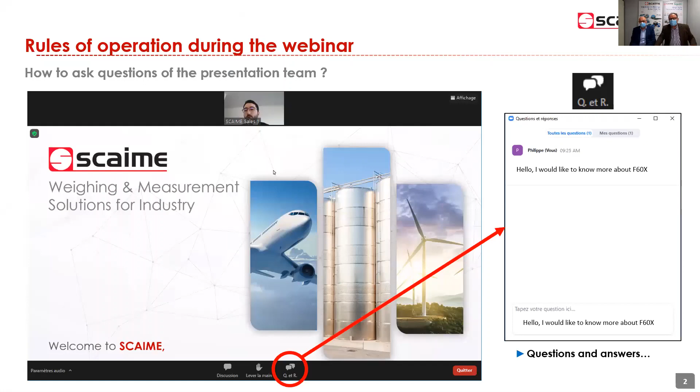So about tank weighing solutions, why are we talking about this as an important issue? Of course, tank weighing is used for measuring what is inside a tank, a hopper, a vessel, and the weighing gives the possibility to know the exact amount of material inside this vessel. And when it's connected to a central computer system of the company, it gives the possibility to have an on-time, real-time inventory of the raw materials used in the process.

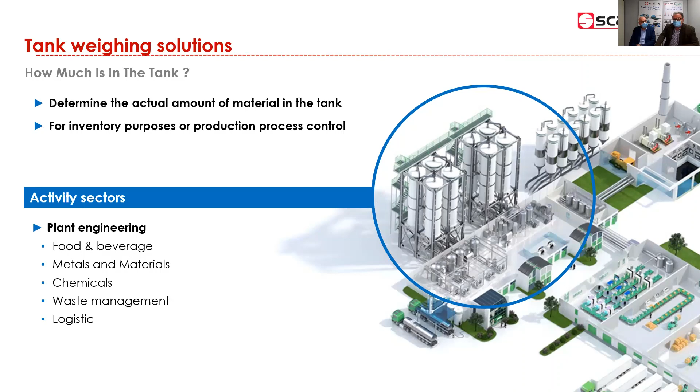So the activity segments targeted by such applications are, of course, food and beverage applications, because there is a lot of mixing of all kinds of raw materials. Metal and materials, chemicals, waste management, logistics. So today we'll discuss with Olivier all these different applications, and we will tell you what is used in our range and why we have launched this or that weighing kit in order to make it simple for our customers. So, Olivier.

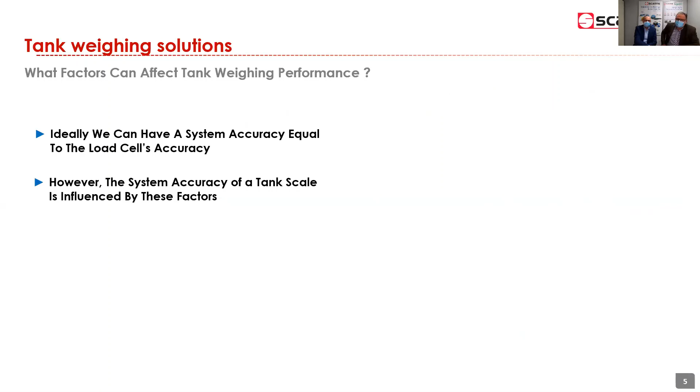Okay, Olivier, so what are the factors which can affect tank weighing performance? Yes, before describing exactly our mounting kit range, it's very important to come back to the factors that can affect the performance, the accuracy of a measurement. Because ideally, when we put load cells under a structure, a vessel, we would like to have the accuracy equal to the load cells accuracy. But in real life, it's never the case.

And the system accuracy of a tank scale is influenced by a lot of factors. It's important to know what these factors are, because our kits are designed to minimize the effect of these factors. So here's a quick list: structural integrity, installations, calibrations, tank design, environmental effects. All these factors can affect the accuracy, and we will list the main factors of influence.

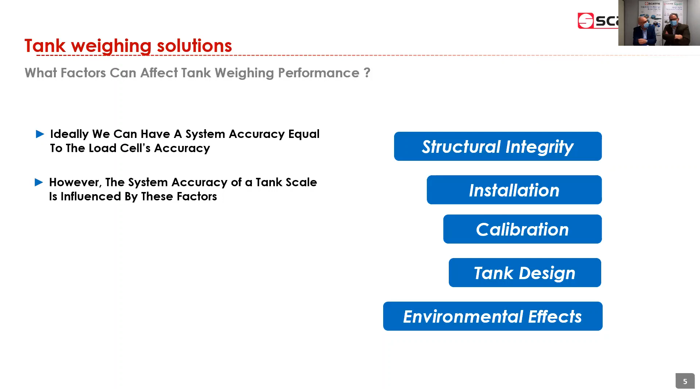So what are the main factors of influence on tank weighing? The first one, for example on an external tank, is the wind or seismic force. This can affect the accuracy because there's an effect on the load cells. For example, big vertical silos can be considered as sails, so when there is wind and the silo is empty, you may have a very strong side force which could push the silo and let it fall. You can also have vertical force, and there's some risk of lifting off the silo, so you have to take care about this effect for safety.

For accuracy, one of the main effects is the temperature effect, because a tank is often a piece of metal, and under temperature changes you have contraction or expansion of the structure. If you fix the load cells directly from the ground to the structure, you will have unwanted forces, and the accuracy will be affected. So one of the main goals of the weighing kits is to separate the load cells from the structures.

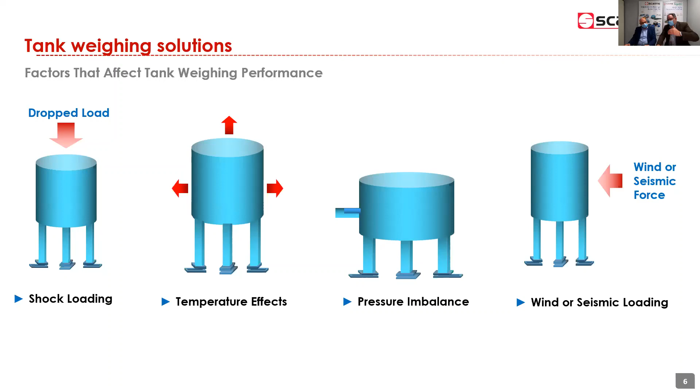Yes. An important factor of influence, because often the use of a tank is to mix some product, is the vibrations. You could have internal vibration in case of a mixer, and you could have also external vibrations due to some external effect. And all these effects - for example, in big factories, sometimes you have big metal structures, everything is shaking inside. Yes, you can have external motors or external devices that can generate external vibrations. We experience that many times.

Also, a very important factor is the structural design of the tanks, and it's very important to minimize the deflections under load between the different load cells to have good accuracy.

And the last effect, very important, is the piping, because generally on the tank you have to fill and unload the tanks and so on. You have some pipes, and it's very important to minimize the effect of the pipe for the weighing.

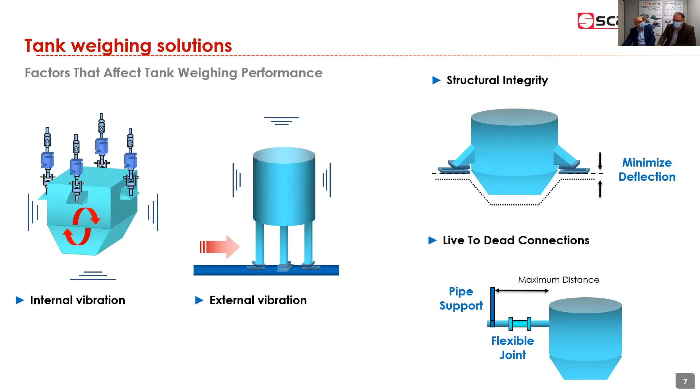So on the load cells, what is the main importance for the accuracy? We would like to measure the vertical load. The vertical load is the force we need to measure - in real life, gravity. And the main functionality of our kits is to measure this vertical load by eliminating all the unwanted forces.

You can see below the slide, for example, the angular load, eccentric loads, torsional moment, or side force or end force. All these forces could affect the accuracy of the load cells. And so if you fix the load cells directly to the structures, as you have some deformations of the structure, you will generate this type of unwanted force that can affect the accuracy.

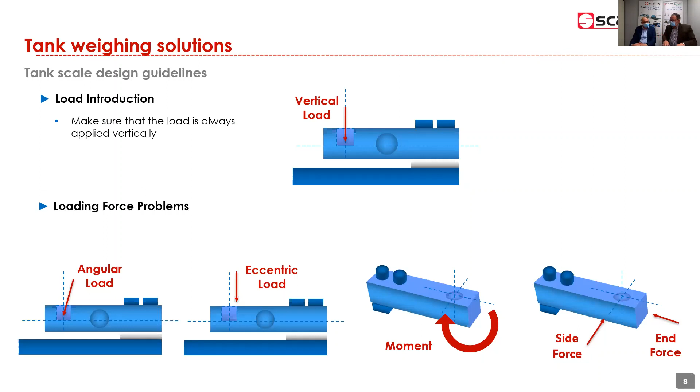So to summarize, the only force we want to measure is the gravity-accelerated mass, so it's purely vertical. Any other force applied to the load cell will be read by the load cell, but the load cell will not be able to make the difference between the real load and the side force. Exactly. So that explains why it would really affect the accuracy of the system, and that needs to be taken care of by the kit.

For example, a static horizontal vessel without mixer. So typical liquid tanks. Yes, liquid tanks. You don't need restraint device. You need a safety device, for example stoppers, because you could have exceptional shocks or accidents, but in normal operation, you don't have big lateral forces, important lateral forces.

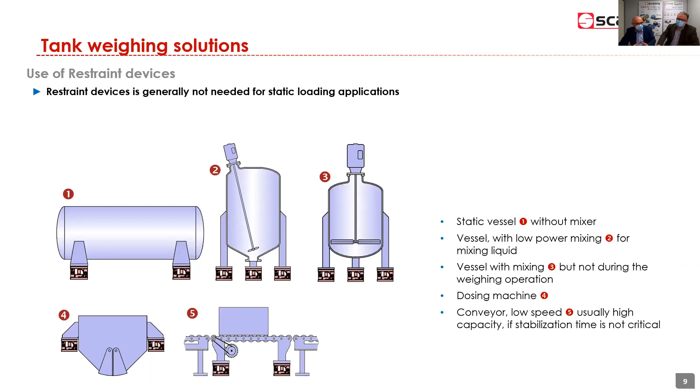About conveyors, it depends generally on the speed and the capacity. Generally, for low speed conveyors, you don't need to add a restraint device. At the opposite, for dynamic loading applications, you need to add a restraint device to avoid displacement of the structures.

It's the case for vessels with high power mixers for pastes or for powder or solids. In that case, you will generate lots of lateral forces during operations, and you have to restrain the displacement of the tank.

It's for the second example, you don't have mixers, but it's a particularity of piping. If you have rigid pipes, you don't have to forget to add restraint, because you could have a pipe failure due to fatigue, due to vibrations. It's very important when you have lots of rigid pipe without flexible, to avoid a big displacement, a lateral move.

Also, the third example is a horizontal mixer with a big mixer for pastes. Generally, restraints are requested, and it's the same for high-speed conveyors. Generally, for high-speed conveyors, if you want to weigh with a minimum of stabilizations, you need to add restraint. So in that case, you stop the crate, for example, on the conveyor, and you generate side forces.

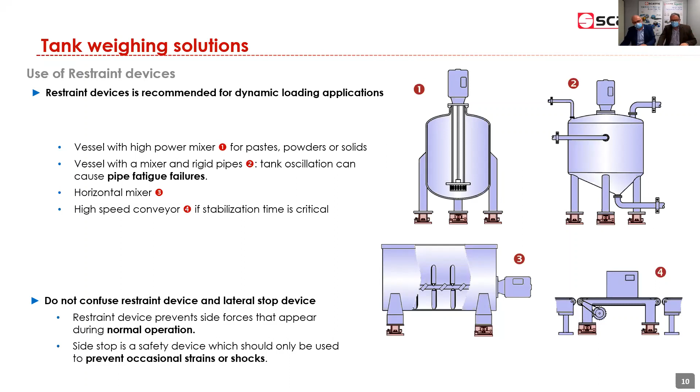So let's go for the offer we have, explaining why we have different kits and what they are used for. That's the key point.

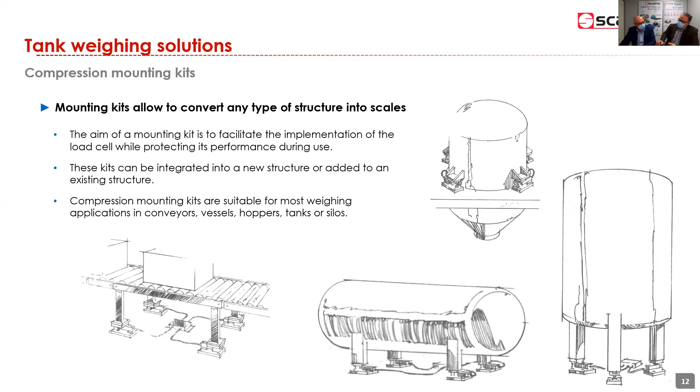The mounting kits allow converting a structure into scales. The aim of mounting kits is to facilitate and make the implementation of mounting easier, and to minimize all the unwanted effects we have seen just before. So in other terms, make it simple for the teams installing the products, and take care of all the environmental effects that might affect the measurement.

So here it's an overview of our mounting kit range. As you see, we can provide mounting kits from a very low capacity—we start at 10 kilograms by load cells—up to 750 tons. So it's a pretty comprehensive range, for all the capacities, and capacity is the first data we have to take care of.

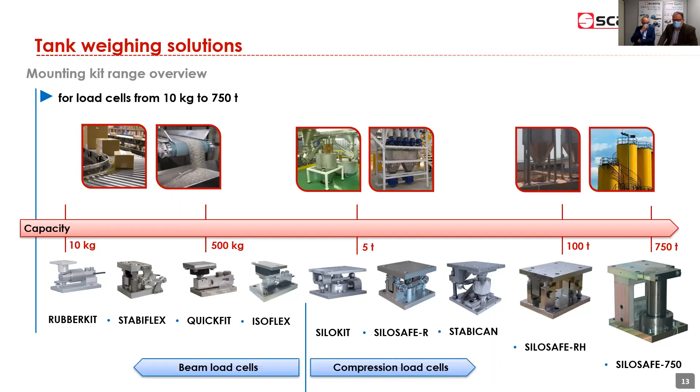So we will start with a low to middle capacity, from 10 kilograms to 5 tons, with the Quickfit mounting kit. The Quickfit is the last mounting kit we have launched. The advantage of this kit...

It's articulated. It provides also a possibility of angle of tilt of the structures, that can tilt in both directions. And here it's very interesting.

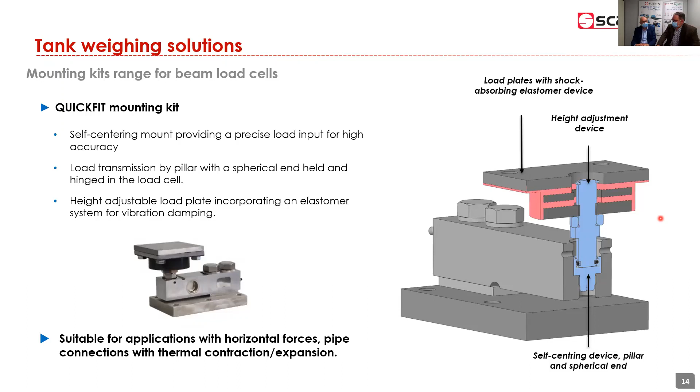So that's the Quickfit, one of our latest kits in the range. I think we launched it at the beginning of last year, and it comes always in stainless steel. Yeah, so let's see the next one.

The next one is a rubber kit for low capacity, from 10 kilograms to 500 kilograms. That's the one here, for the F60X load cells. And the Isoflex is for the SK30X, up to 5 tons capacity. So it's the same principle, but one is for the bending beams up to 500 kg, and the other one is for the shear beams from 300 to 5,000 kilograms.

The main function of this kit is to absorb shock and vibrations. You have a big elastomer as a damper, but the difference with a Quickfit is that you don't have articulations, so it's not possible to tilt it. It will not absorb a difference in parallelism that you may have in the structure. The Quickfit is very well fitted for that. The Isoflex needs to be perfectly aligned if you want good accuracy. If you have some tilt of the structure, it will affect the accuracy.

These kits are available for applications with horizontal force, pipe connections, but with low thermal contractions and expansions. This part here is rigid, it will not move, compared with the Quickfit where we have this articulation. Here we are totally rigid, which means the elastomer itself has to take care of all the differences, and that makes it so it could absorb some tilt, but it remains some torsional moments. And torsional moments mean a bad effect on the measurement, the quality of the accuracy.

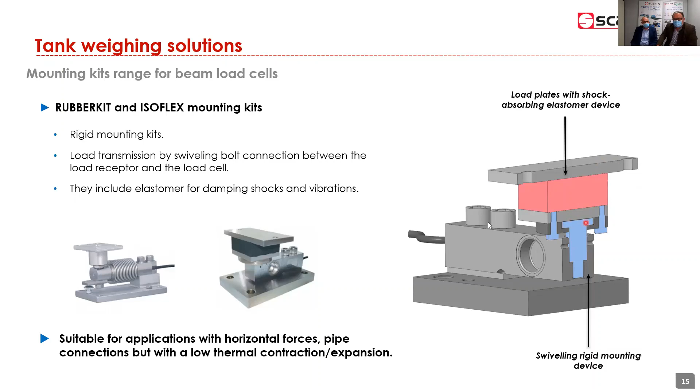Okay, it's clear, so that's for rubber kit and Isoflex. Some examples: a typical application for rubber kit is small hoppers. Here you don't have a lot of expansion or contraction because it's very small, and you have some product that falls inside the hoppers. In that case the rubber kit is perfect, because it will absorb this, it could absorb the energy of the product falling inside.

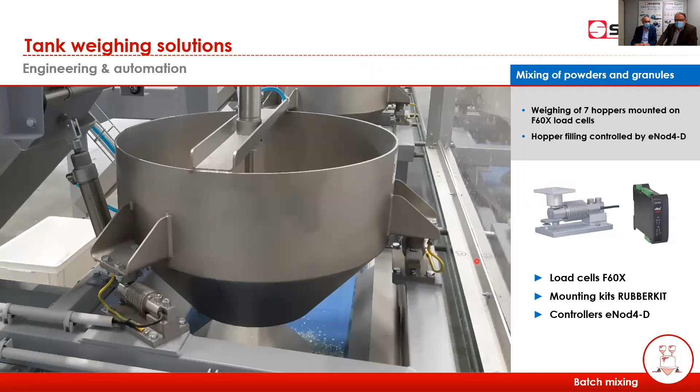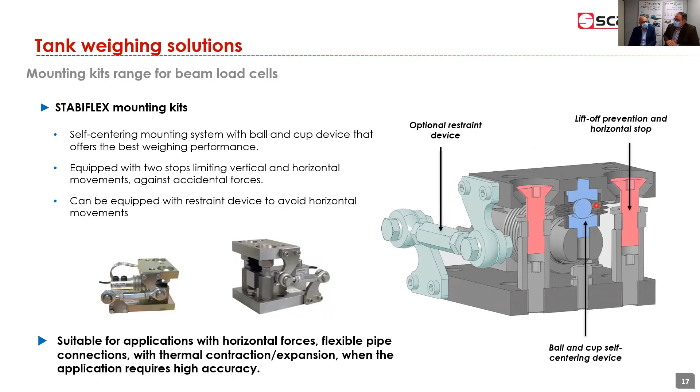A small example of Stabiflex used in static applications for weighing of external silo, for the farming industry, for storage of animal feed. In this type of application, the Stabiflex is perfect.

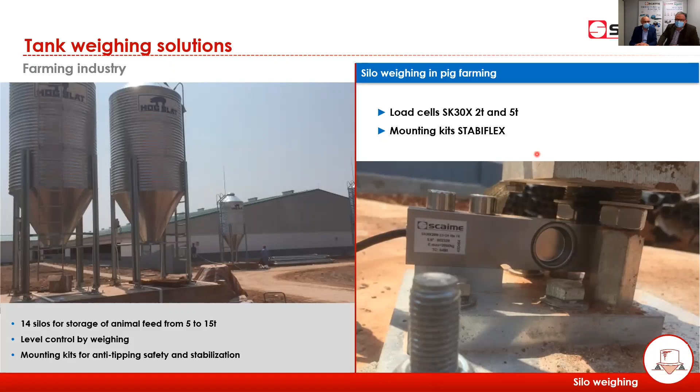Okay, so that was the farm in China, if I remember well. Yes, exactly, a pork farm.

Pork farm. An example of dynamic applications is weighing of a palletizer conveyor with big pallets, up to 3-ton pallets, pallets of cement I think. And when the pallets stop on the conveyor, you have big lateral forces.

To avoid displacement of the conveyors and to stabilize quickly the conveyor for a quick weighing, we add some restraint on the Stabiflex.

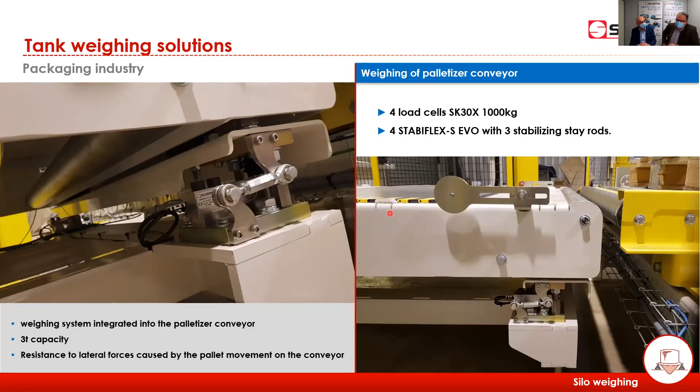If you want high accuracy, you have to choose the Stabiflex. If your accuracy is less important, you can choose the rubber kit. But in that case, you could have lower accuracy for the same load cells accuracy, except if you take care of perfect horizontality.

If you absolutely need height adjustments, you can choose a Quickfit. And if you have lots of vibration damping and you don't want to add external devices, for example for the Stabiflex, you could use the rubber kit.

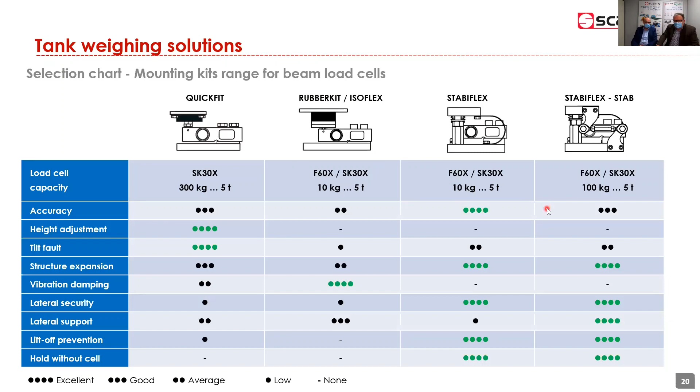So that was for the bending and shear beam kits, up to 5 tons. If we need to go above, we have other solutions.

Yes, our traditional solutions are based on the CB50X load cells, a column load cell. These kits provide self-centering devices, provided by the construction of the load cell itself.

So we have a radius here on the load cell, which will always put the load cell naturally back in its natural position if there is a side load that pushes it. So it will come back to normal position.

Exactly. These kits also provide a lift-off prevention device, shown in red. And here it's not optional because we don't have stoppers, so we have a restraint device, which is here always because we don't have a choice of stoppers.

So the main disadvantage of these kits is the very high cost, and it could sometimes be difficult to integrate into existing silos, for example.

So here we are talking of capacities from 5 tons to 200 tons? 200 tons, yes, so that covers a very wide range of capacities.

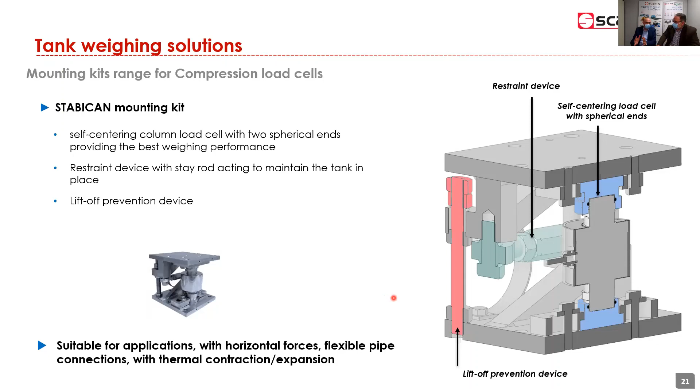Okay, the other solution. Oh sorry, just an example of a typical application with high capacity: the CA40X 200 tons is for weighing a horizontal tank of 500 tons externally, and the Stabican can provide lift-off prevention, stabilization, and safety for this type of tank in the chemical industry. So very heavy duty.

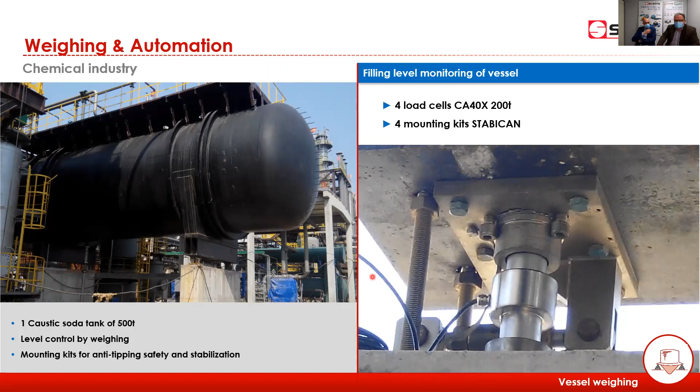The stabilization is provided by a plate, a blade. You have a blade restraint, but this restraint is not very heavy, so it has limited side force. Yes, it's limited, and with these kits, you cannot have... this kit doesn't have the ability to

allow displacement between the upper plate and the lower plate, and so the result is not recommended with thermal contraction or expansion. For example, in the chemical industry, when you have reactions inside a hopper, the temperature is going up, so the system is expanding, and that could affect the good measurement because it would apply some force. In that case, this type is really not recommended.

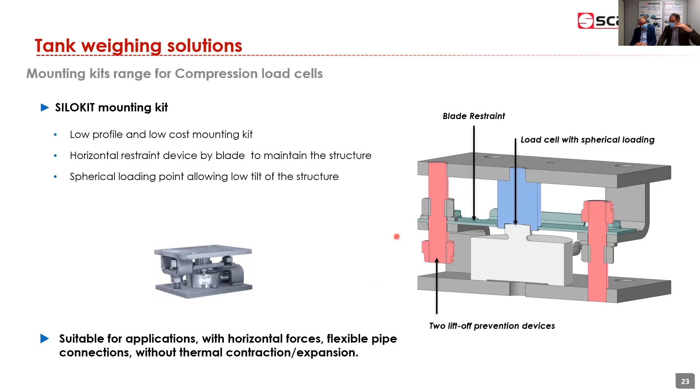It's recommended mainly for static applications. So it's low profile, good for level control, but you would not suggest it for any other application. Exactly. So what do we have as a solution?

And here, for the accuracy, we provide a self-centering device, exactly the same design as the Quickfit or the Stabiflex, to provide a high level of accuracy, the same level of accuracy as the load cells. Also, we provide as a standard, stoppers for safety.

You have some axles that act as vertical stoppers and lateral stoppers, both, in combination with this system here, which accepts side loads without affecting the load cell.

For static applications, you don't need a restraint device, just the stoppers are required. And if you have dynamic applications, you could add, as an optional feature, restraint devices to avoid displacement of the structures.

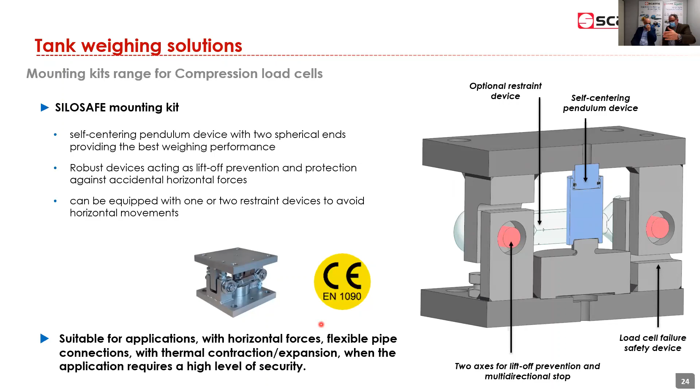The dimensions of the R10X are very similar, the same, yeah, very similar. So of course, as it's a high accuracy load cell, it will be requested to use this one rather than the Silokit. Okay, very interesting.

So we are speaking about that, yeah, EN1090. So it's an option, doesn't need to be requested at all times. Usually in Northern Europe, it's requested on a regular basis. Yes, in France, in some Southern European countries, it's not requested too much. In France, it's not useful, but not for now.

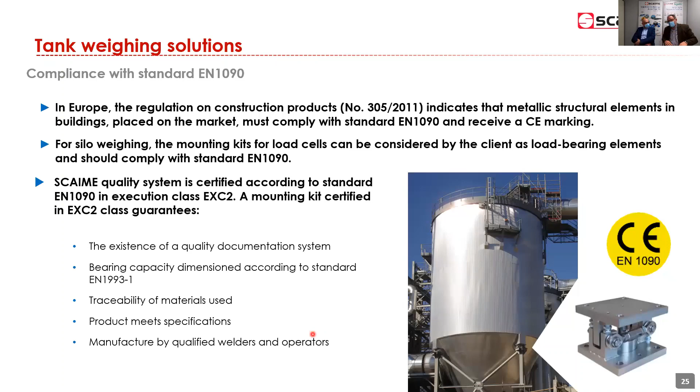In Germany, in Belgium, I know... I would say the standard, as far as I know, is official in Europe, except that each country has to convert it into its national laws, and the speed of doing that differs from the speed of getting the directives from Brussels. Exactly, so that explains why.

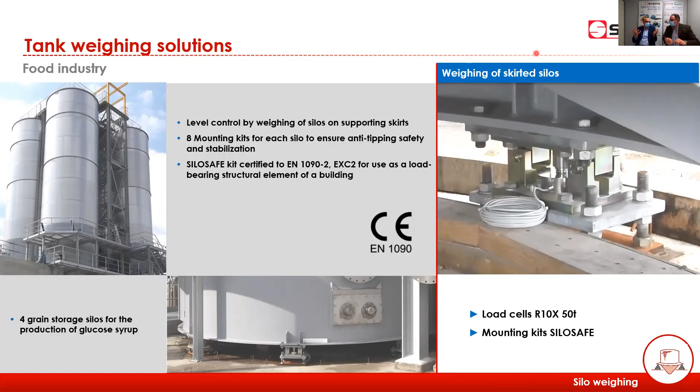Here's an example of integration of the SILOSAFE. It's an interesting application because it shows you don't always need to integrate weighing to weigh a silo in a particular way. Here it's a skirted silo, and we provide R10X and SILOSAFE devices, eight of them, to weigh the silo. So eight times, just 50 tons. You just need a rigid structure.

But if you need a very simple application, static applications, if it's only low cost for level control, the Silokit could be sufficient, and the cost is clearly lower.